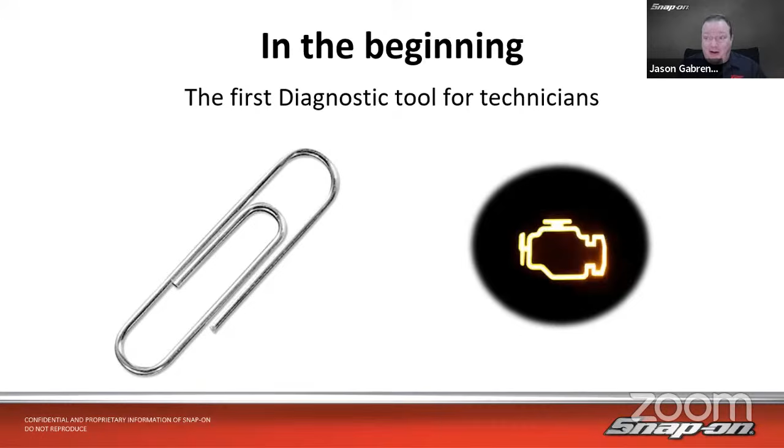So a little history, as we said, 1981, GM introduced the ALDL connector. ALDL stands for Assembly Line Diagnostic Link, and that's this guy down here on the bottom. This is the pinout for that. So different data links for different things, diagnostic terminal A and B. Really, you just short those 2 out, and that's where you get your flashing light, right? So that was one of the very first OBD1, I guess, connectors.

1988, CARB, which is the California Air Resources Board, they have a lot of say in what goes on with emission systems on cars, for better or for worse, but they required some OBD capability on all 1988 and newer vehicles. So if they were sold in North America, or at least the United States, I'm not sure how Canada went with that, but 88 and newer, anything sold in the States had to have some sort of diagnostic capability.

In 1996, they decided there was all this smorgasbord of different connectors and protocols, so they decided OBD2 would be mandatory on all vehicles in the US. That was SAE, the Society of Automotive Engineers, which came up with that standard and made it mandatory in 1996 in the US. Over in Europe, in gasoline engines, EOBD, European Onboard Diagnostics, was mandatory starting in 2001, and diesel vehicles were added as mandatory in 2004.

So as I said, back in the early days it was kind of the Wild West. We had all these different connectors. There's this Toyota connector, I think that's actually a Subaru connector. Honda's in there, BMW's in there, Chrysler's in there, Ford's in there. A lot of different manufacturers using a lot of different pin types. That's the Mercedes, that's the BMW. Different things on different pins, and that's how we communicate.

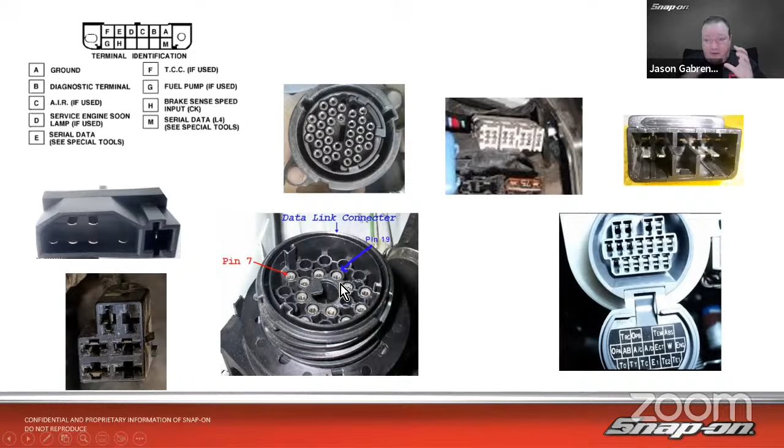But in order to communicate with all these vehicles, you needed all sorts of connectors. So we had all these different various connectors - one for the BMW, one for the Mercedes, a couple multi-pin ones as well. If I had one that wasn't really popular, it would tell you where to hook up each wire to get to where you needed to go. Plus they had all the other major manufacturers. They did have some kind of weird ones too, like Mitsubishi here.

We had to actually use OBD2 and OBD1 - it was kind of like an OBD1.5 going forward. That was back in the early 90s, 90, 91, when they had those DSM vehicles like the Eagle Talons and the Mitsubishi Eclipses, things like that, where they're all kind of the same car but under different brands. You would have to use that weird connector for that.

And now all of these would still work today even. So if I have a 1985 something or other coming to my bay, I can still hook up to it as long as I have the right connector. And then there's a little adapter here that we use - you've got a 15-pin on one side, and then your standard OBD2 connector on the other side. So you hook up your Snap-on scan tool to the OBD2 side, then pick whatever adapter you needed, plug it in there, and make sure it's powered up because it does need power. There's little power ports on the sides.

Once it was powered up, though, you could go in and scan it just like with a Solus Plus, Zeus Plus, whatever - all the tools work all the way back to 1980, 81. So that's helpful if you have any of these connectors from way back in the day, because I know people have probably still even got their own red brick. Some of you out there might even still have it. The connectors that came with that would still work today, and actually you could still use the red brick on those cars nowadays too. Some people do, because they just feel maybe it's a little faster - maybe that could be the case because it wasn't all that complicated back then.

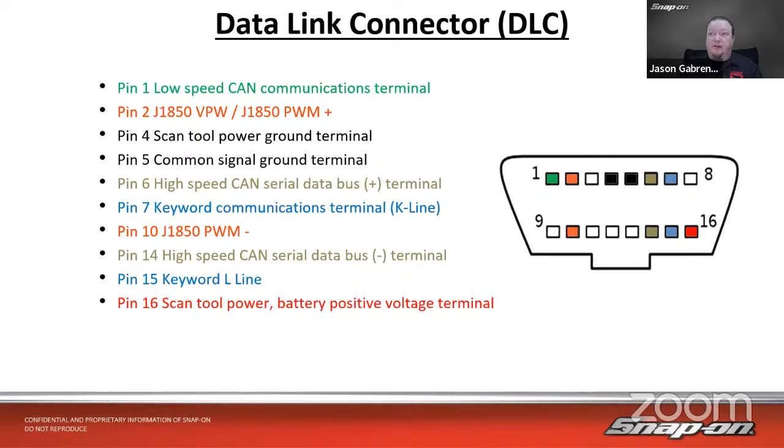You may have heard me speak about a vehicle's computer many times like a house, right? So it's got a front door and a back. Coming in the front door is going to be all my inputs - my coolant temp sensor, my NOx sensor, my oxygen sensor, all those inputs go in. Then the computer processes it, and then it sends that data out the back door to the scan tool.

Now, what I don't talk about as often is that inside that computer, there's also two rooms, if we're still using that house analogy. So we have an OEM VIN specific side, which is where you would go if you click on scanner - that's the OEM side. There's also the OBD generic side of the PCM, and that is going to be pretty much the same on every single vehicle. We'll talk about some differences as we go through here.

But there are two different ways that it's going to process that data. This is up to the OEM - however it processes it, and it can be different. The OBD generic needs to be the same no matter what, across the board - it needs to give the same data, the same instructions, and so on. And you'd access that side through OBD Direct.

You can also access it through the scanner side. There's a way we can kind of break that wall, put a little window through it, and get on both sides at the same time. I'll talk more about that later on in the presentation. We go live on the vehicle.

Just be aware, there can be times where you will have a different number of codes. You could have 5 codes on this side, 3 codes on this side, or 3 codes on this side and no codes on this side. It's going to vary depending on whatever threshold the manufacturer decided to set in order to set a code, versus what the federal emission or California emission standard is on the vehicle as well. So they will process them differently - you can find different numbers of codes, or different codes entirely.

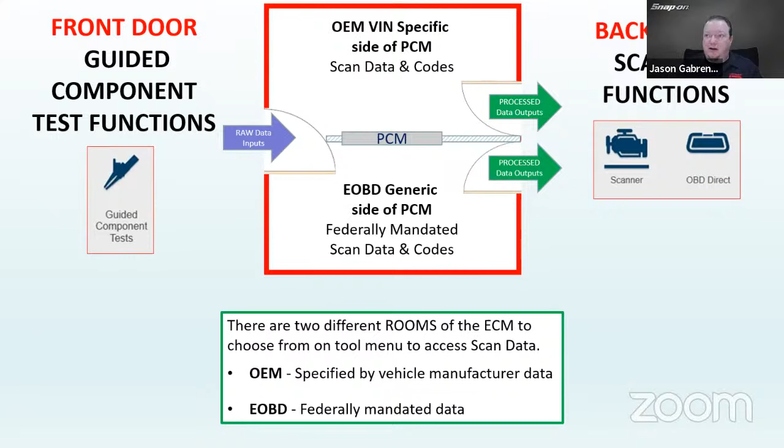Just be aware that's not a scan tool problem - that's just how the manufacturer set up their computer, that's the issue. I'm pretty sure I have some examples of this as we go on throughout the presentation. But just know there are two different sides, and that's why we're focusing on the OBD2 side - because we usually focus on that OEM VIN specific side, but there are differences in between.

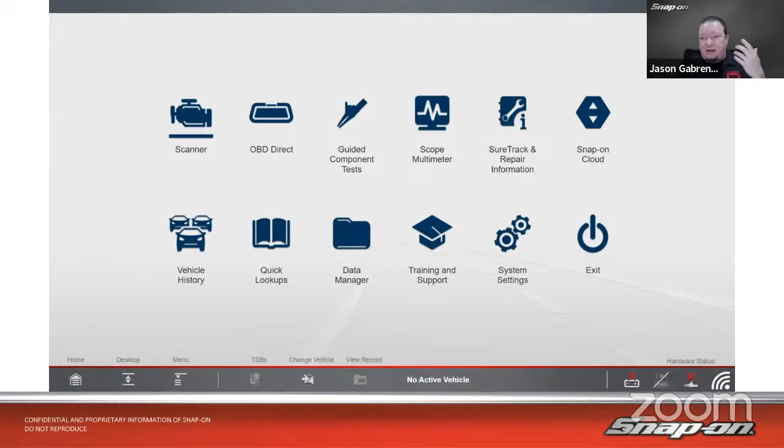So in order to find that information - to get into that OBD generic information - we're going to want to use the OBD Direct icon on our tool, however you access it. If it's a Snap-on tool, it's going to say OBD Direct. Other manufacturers may do it different ways, but all scan tools need to be able, at least in the States, to get into this side.

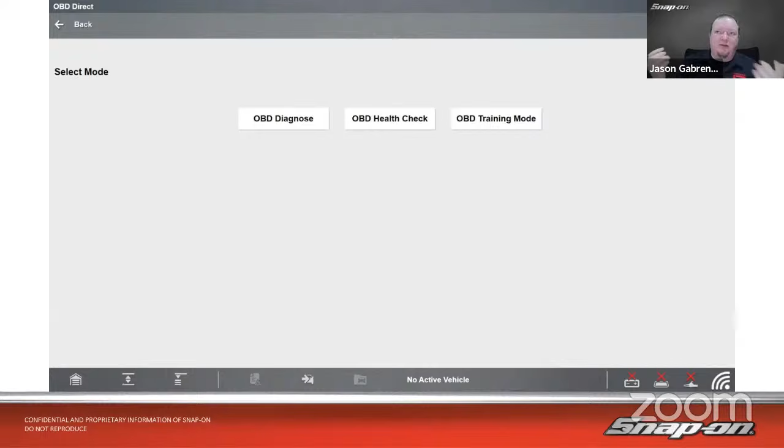Now you see we've got OBD Diagnose, we've got an OBD Health Check, which is kind of like a code scan, and then we have the OBD Training mode. If you have a Snap-on tool, you can go into that OBD training mode without having to connect to a vehicle, and you can go in and just kind of read through it, look through OBD2, and see what the deal is. But in this case, we're going to go to OBD Diagnose.

We have Start Communication, Connector Information, and Manual Protocol. So in order to actually communicate with the vehicle, we're going to go to Start Communication.

And then you'll see the landing page. Now, depending on the year of the vehicle, you may see some different things here. Some of the modes may be different. Some of the modes may be missing. You may have multiple versions of a couple of these modes, and we'll get through that as we go through the between this week and next week.

We'll talk about some of those differences and exceptions. For example, some of your newer cars are not going to list mode 5 because they kind of roll them up, mode 5 and mode 6. That's next week, we're going to talk about that. Some older OBD2 vehicles will not have mode 10 because that didn't come into play until like 2011, I believe. And then some of your mode 9s may be different too.

You'll actually see a difference when I go live on the tool as well. But if we're going to just go through what's displaying on the screen here, the first one's going to be readiness monitor. Now in readiness monitors, this is going to give you what monitors have completed either since the code was cleared, or what monitors have completed this drive cycle.

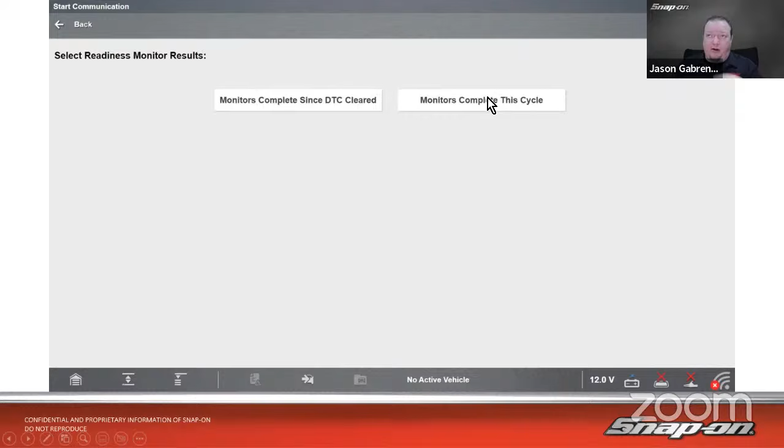So depending on where you are in your diagnosis and what you want to see, you can go in there. So monitors complete since the DTC is cleared. And you can see here whether or not it's complete or whether or not it's supported.

This is just on some demo data here, but you can see test complete or not supported at all. So this will allow you to go in, do a real quick check, say, hey, is this thing ready to pass an emissions test, for example? You do a plug and play emissions test, you're probably going to need that. You're going to have all but maybe one monitor, depends on the state, but it's usually all but one monitor completed on that. So you'd have to have all but one of those say test complete or not supported.

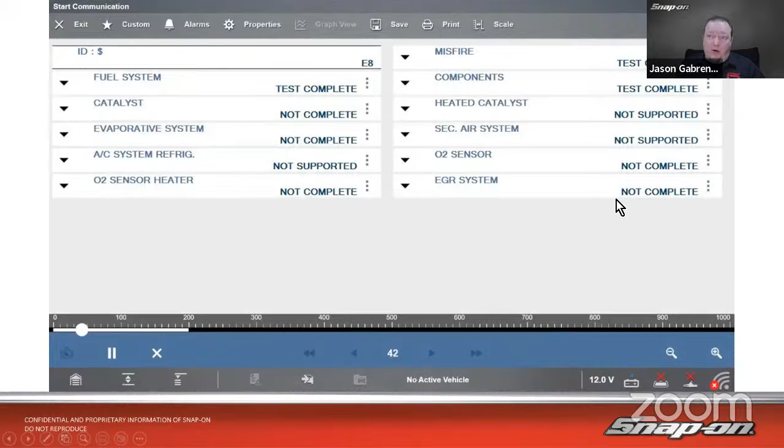MIL status is pretty self-explanatory. It's going to tell you whether or not the light is on. But here's one thing that's exclusive to Snap-on that I think is pretty useful, especially if you're kind of learning or relearning or trying to remember things about OBD2, maybe you don't use it all the time.

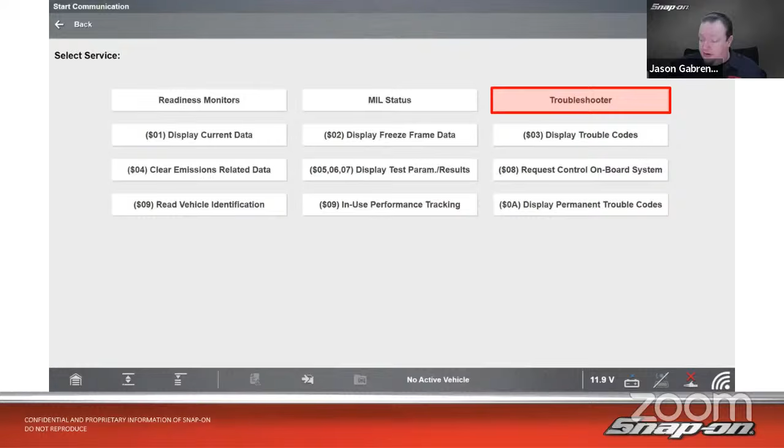So there actually is a troubleshooter in here. Engine troubleshooter. And you'll see we have code tips, parameter descriptions, which is very helpful, guidelines and procedures, and a general help section. So if I were to go into code tips and I wanted to look up information on a code, whatever it happens to be.

Is it a B code? Is it a C code? Is it a P code? If you want to learn what all those mean, if you look back a couple weeks on the channel, we talked about code basics and we talked through all that. But you would just select your code and it would give you a description of that code.

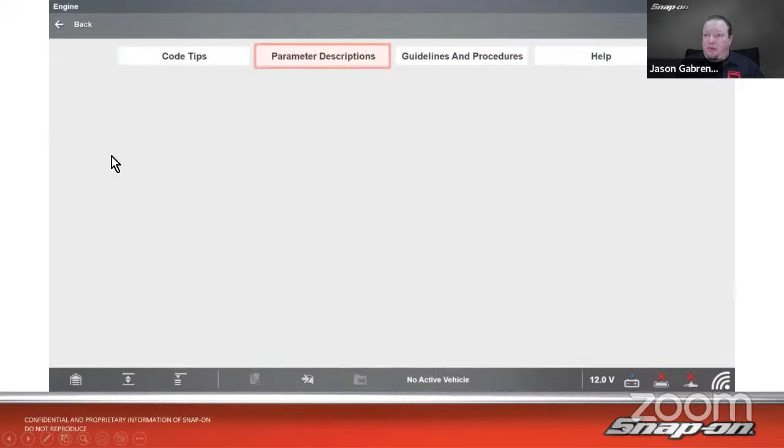Also parameter descriptions, like I said, very, very helpful with that. So we got, say, whatever I wanted to see, say like a voltage or something like that. So I picked oxygen sensor voltage bank 1. Expected reading will be engine cold, 0.45 volts and no switching. Engine hot and closed loop, 0.2 to 0.8 volts switching once per second. Read the data stream in conjunction with fuel trim for a further indication of history.

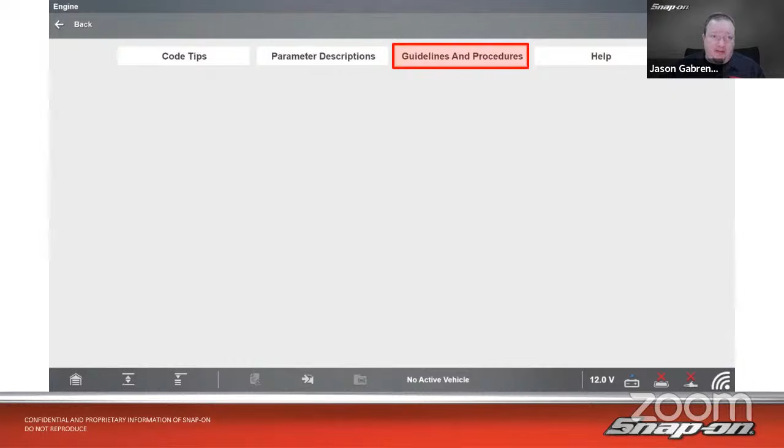Next one's guidelines and procedures. So you're going to see diagnostic services introduction will kind of give you an overview. Workflows, field recommended general mode information workflow.

So you can just go in there and say, okay, what should I check in what order? And then it also gives you each of the modes, or in this case they call them services, of OBD2. It goes from mode 1, 2, 3, 4, 5, 6, 7, 8, 9, and then 0A is mode 10.

Now I get questions on this. What's the dollar sign? Does that mean I need to pay for it? No, it's just computer language. They just put that dollar sign character in there for, I'm not 100% sure why, but it's just a computer thing.

And then it goes from 09 to 0A because we're doing base 16. Computer language is base 16. So if I went from 9, the 10th digit would actually be A, because it goes 0 through 9 and then A through F. That gives me 16 characters I can use in computer language. So it goes 08, 09, 0A would be 10. Just know that there is no actual 10 in there, it's always a leading 0, so to be A. If they added a mode 11 somewhere down the road, it would be 0B. So it just keeps going up on that base 16.

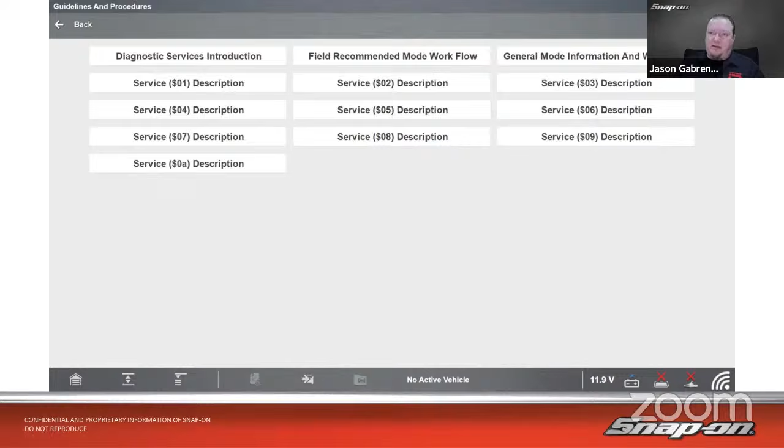And then we have help. So if I need generalized help in here, 5-digit OBD2 code information, readiness monitor information, generic drive cycle information, not vehicle specific, because there are vehicle specific drive cycles too, and abbreviations used.

So let's look at the different modes. Like I said, we're going to go through the first 4 tonight, and then next week we'll go through the other 5. So, OBD2 modes.

Mode 1 is going to provide access to diagnostic data such as inputs, outputs, and status. This is going to be your data stream. All values are going to be current values, and no substitute values are allowed. This can be helpful if I'm on a vehicle that has some sort of data substitution that might be part of the logic. You can go in there and see here's actually what's happening. The computer's not going to lie to me, it's just going to tell me here's what's going on.

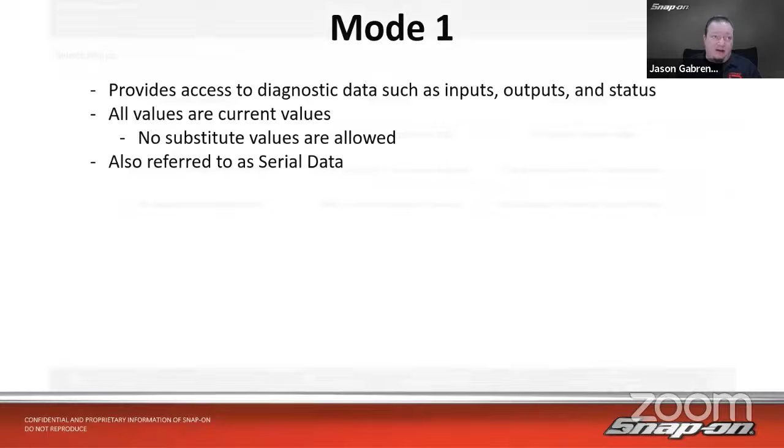This can also be referred to as serial data, you may have heard it called. So we would simply go into mode 1, display the current data, and it'll give us our data stream like we would be used to anywhere else in the vehicle. But just know that there's no substitute allowed in here, so you do not see that substitute data.

Mode 2 is going to provide access to freeze frame data. So what freeze frame is, is that mode 1 data, the data stream, from the time of the fault. Once again, all data has to be actual values, no substitute values are allowed. So this might help you a little bit more than just looking at the OEM data.

Freeze frame data can also be used to duplicate vehicle conditions for diagnosis. So it gives you here's what happened exactly when the fault occurred. Was it cold? Was it hot? Was it driving for an hour? Was it driving for 5 minutes? What was the throttle? What was the load on the engine? What do I see here? That helps you as a technician go duplicate the customer's issue.

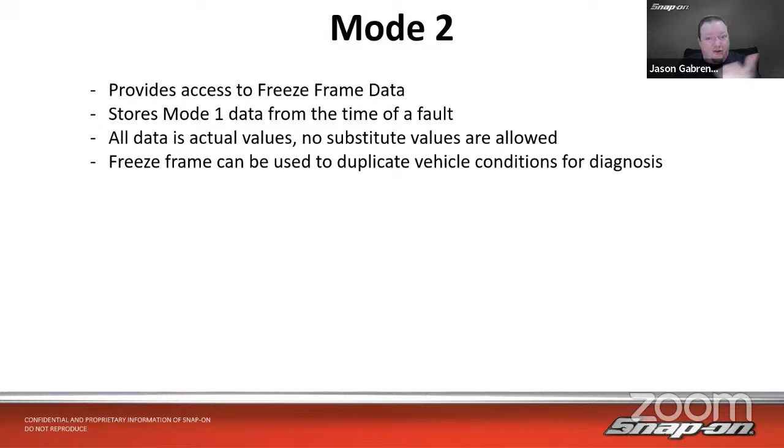So if it happened when it was hot after driving it for half an hour, then you're going to have to drive the vehicle for half an hour when it's hot, under those general conditions, to see if you can duplicate the problem, right?

And I love that too. You get the ones where the customer comes in and the car's hot, and then you go to the freeze frame and it's cold. I'm sorry, you got to leave it overnight. We got to wait till the car's cold overnight, and that usually doesn't go well, but that's what you need to do.

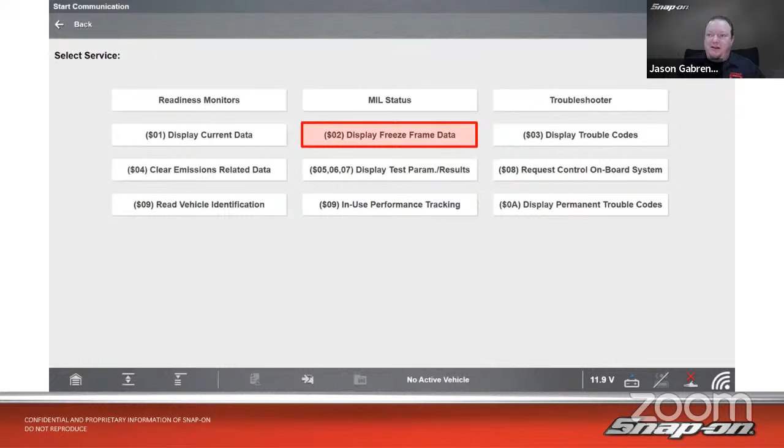So you'd go into mode 2, freeze frame, and then once again you would see here's what happened at the time the last code set.

There it is. Then we have mode 3, and that's going to be your codes, right? So it's going to be emissions related DTCs, emissions related only. So it's not going to be body control modules or chassis or anything like that, you're going to see emissions related DTCs only. So it's going to identify the faults using specific criteria. It could be signal or component short to ground, signal or component short to battery power, or no signal or a component open circuit.

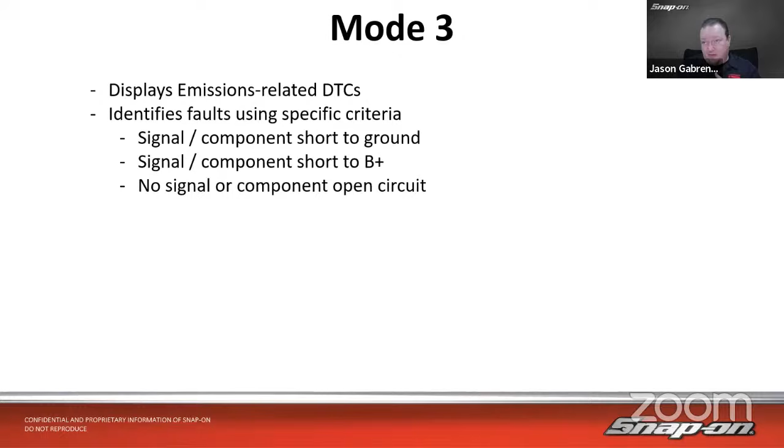It's going to give you those codes generalized in that way. Go into mode 3, and you'll see in this case we got 1, 2, 3, 4, 5 different codes listed. I think this is on the demo vehicle, but you'll see intake air temperature sensor 1 circuit, bank 1, mass or volume, circuit range of performance, circuit low, circuit intermittent. You'll get those sort of descriptions.

And by the way, remember how I talked about the two sides? Manufacturers can have different descriptions of codes versus OBD2. So that happens too. But the codes being the same would be the same, just might have a different description.

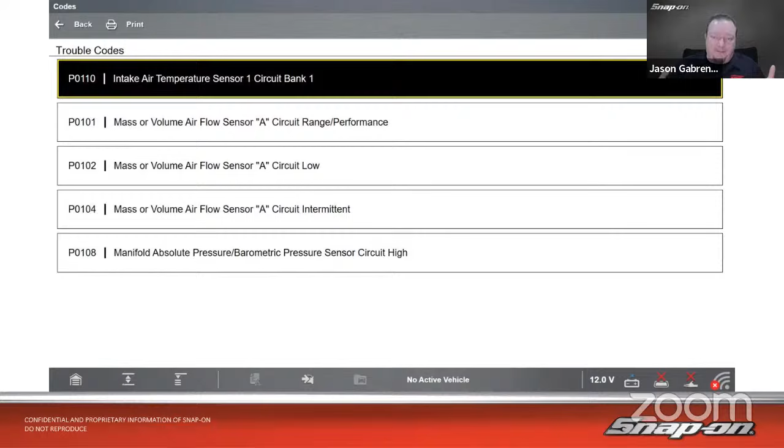Then mode 4 is going to be your last step, kind of. That's going to be your clearing emissions related diagnostic data. So not only is it going to clear a lot of things, just be aware, if you do this, it's going to clear out all the information, all the codes on the OBD2 side anyways. It's going to clear all the freeze frame data, all the oxygen sensor monitoring results, all the readiness monitors, and all the onboard test results. So if you go through and clear this and then expect the vehicle to pass inspection like in an hour, probably not going to happen because you got to go through a drive cycle.

Also note permanent codes, which we're going to talk about next week more, but permanent codes are not cleared in that case. Permanent codes are mode 10, and those are codes that have been cleared in the system, but then they flip over to these permanent codes, and they're going to stay there until the computer either passes the code test -- so it goes through the test to run the code and it passes -- or 400 days, whichever comes first. So permanent codes can be helpful. We'll talk more about it next week, but it can be helpful if the customer disconnected the battery to get the engine light off. If they went somewhere and had their buddy clear the codes or something like that, you can see what codes were there, and is it still a problem with the vehicle?

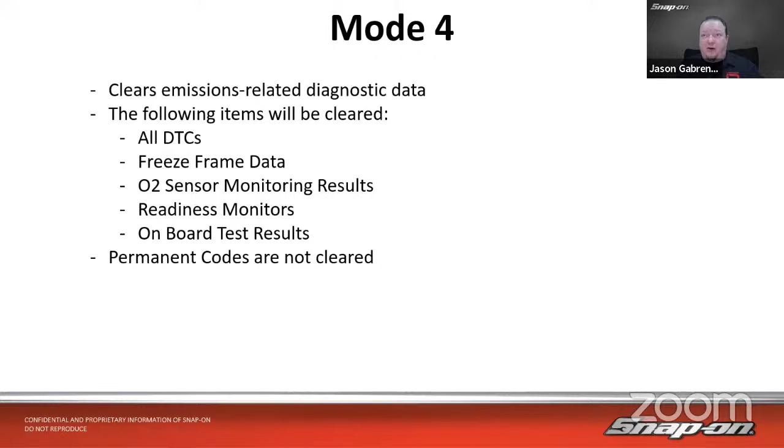So mode 4, you go in there, it says clear diagnostic data, it says all emissions related diagnostic information, MIL, diagnostic trouble codes, freeze frame, etc. Okay, so let's look at the tool.

I have it connected over here to my little Chrysler scanner demo board, and we're just going to walk through a few of those things that we talked about. So I'm going to go into OBD diagnose.

Yes, I'm scanning a real vehicle. Start communication, manual protocol. If you know what protocol the vehicle uses and you want to use that, that can be helpful -- not necessarily on a car. If maybe it has an OBD2 port, or you know what pins are what, you might be able to hook up things that are not cars.

I know I had a boat that a customer had that had a BMW 3-liter in it. Wasn't necessarily a car motor, but I was still able to go in and get data. If you find the right pins for the diagnostics, you can go in, manually select your protocol, and sometimes you can get data. It doesn't happen all the time, but in this case it just did, and I thought that was kind of cool.

There's also connector information in here. So if I need to find the connector on a vehicle, like, I don't know, let's say Lamborghini -- it's on the left side in the center console. All right, so that might not necessarily be a standard location. It's in the left side in the center console.

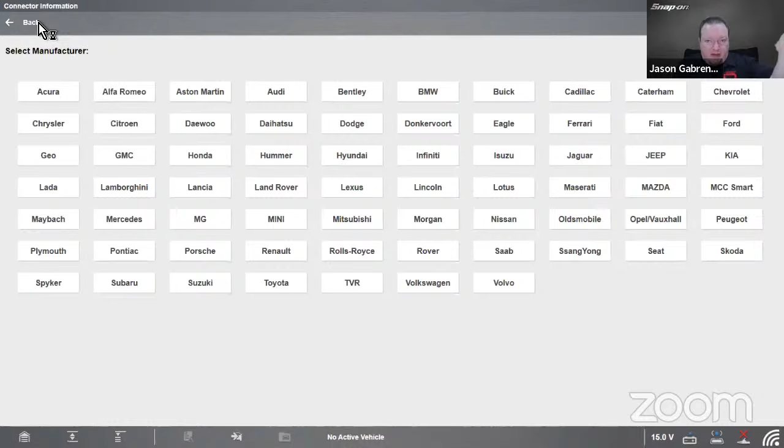Especially if it's a vehicle that's fairly standardized at this point, like Subaru -- let's see what it says about a Justy, right? So Justy was in the driver's door side steering column lower dashboard. There were other Subarus where it was like in the kick panel -- an XT, if I recall, was in the lower kick panel. You had to find the yellow connector, right? So it's not an exhaustive list, but it could help you with some of those weird off-market cars that you don't necessarily see every day.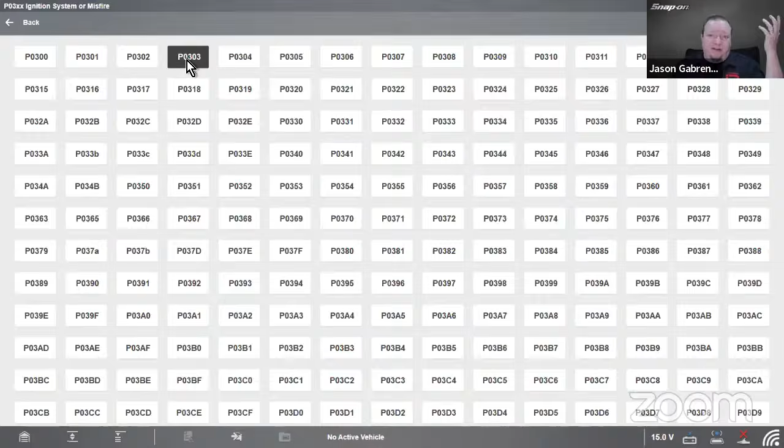If I go back, troubleshooter, I did want to talk about a couple different things in this troubleshooter, like the code tips. So let's say I wanted to take a look at a P0 something or other. And then we have P00, P01, P02. How about P03? Ignition system misfire. So if I wanted to go into your P0303, that's pretty common, right? Sorting the engine control module when an irregular combustion event occurs.

ECM is programmed to expect a predictable reduction in crankshaft speed during a compression stroke, etc. You can read through that if you want. Possible causes is going to give you that down here, just going to give you generalized information.

Let's pick a different one, like a 353. That's ignition coil C, primary control circuit or open. 03A1, cylinder 2 pressure sensor circuit low. So there's a pressure sensor in the vehicle, that's that code there. So you'll see it gives you a full list of every possible code that could happen.

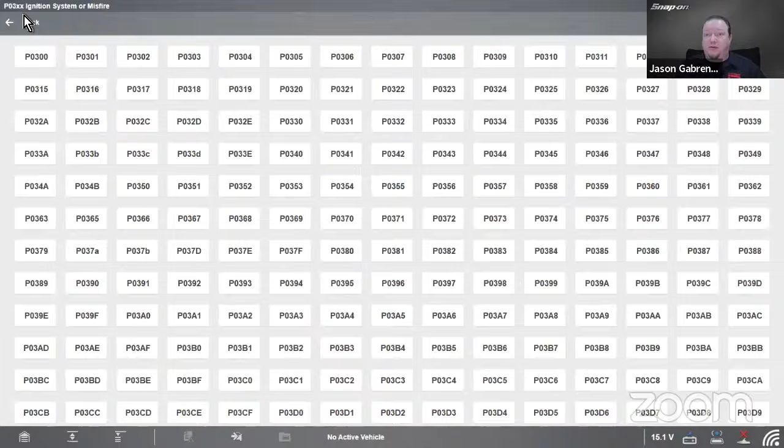And notice how when we get down here, we get into these hexadecimal or base 16 type codes, right? B03, and then that'd be 15, right? Because it goes up to F for 16, 15. So obviously all these codes aren't going to show up on a car, but they could show up on a car somewhere. Not all possible on the same car, but on a car somewhere out there, it's a possible code that could happen. So it's going to give you links and just show you information on that.

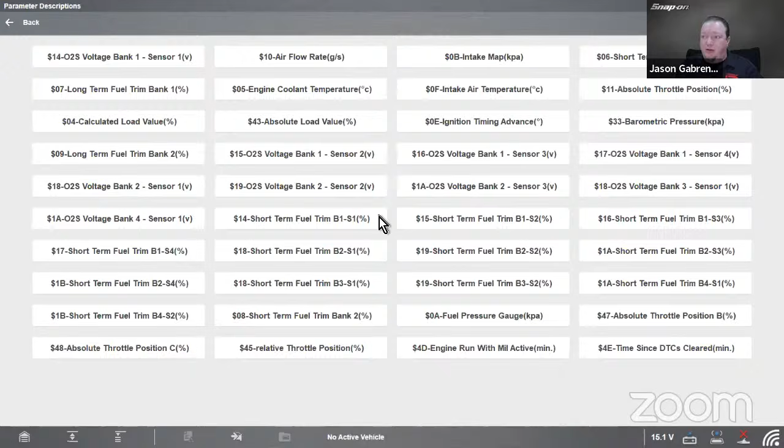Parameter descriptions, let's say coolant temp sensor. This must give us some data at the same time now. So it's going to give you the different, should be similar to outside temperature, between 10 to 20 degrees Celsius, amount of fuel injection, et cetera, et cetera. I'm not going to read through all these, like I said, take a while. But fuel trims, engine run with MIL active, relative throttle position, calculated load value. What do these all mean? I can go in here and it'll tell me what good should be and what it's going to look like.

Guidelines and procedures, like a workflow, right? So carefully study the vehicle, verify the customer complaint, connect the scan tool, check for codes first, then check freeze frame, etc. It just gives you a good workflow to work through and then clear it and so on.

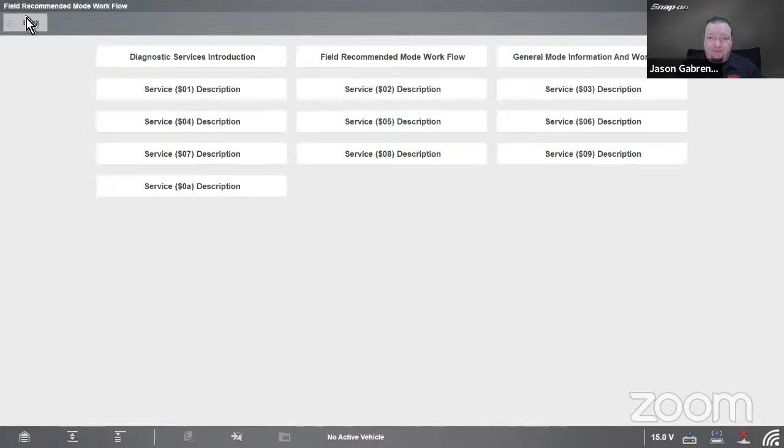And then it gives you your different mode descriptions. So let's see, mode 4, mode 3. Mode 3 displays all stored emissions related DTCs. It identifies the signal fault or sensor fault using specific criteria. All right, so it'll just tell you, if you have any questions about any of that stuff, it's on the tool in the troubleshoot.

And then like things like freeze frame, right? We talked about that. It's going to be on whatever the latest code is. It's going to give you the freeze frame data.

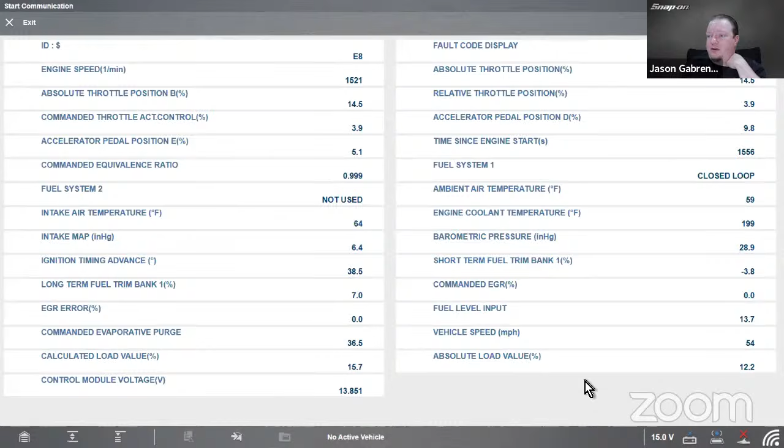All right, so we can see that. Now here's the code P1404, and it's going to go through and give you the speed when it happened, etc. So all good things. That's all part of the generic side.

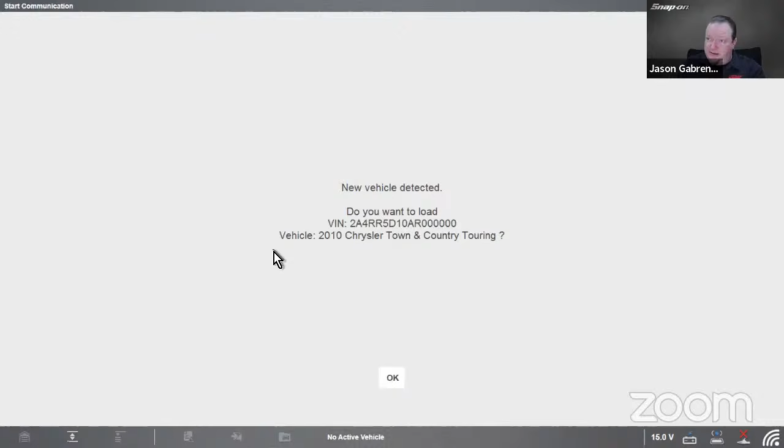Now, I also mentioned that you can go through and check it from the OBD2 OEM side as well. So you want to add vehicle details to the OBD direct section. You can also add this. Since it's a generic vehicle, you can hit yes and it'll save a record. I'm just going to hit no because I don't really need it. I'm going to go into scanner, and it already has it loaded. So I'm going to go in here.

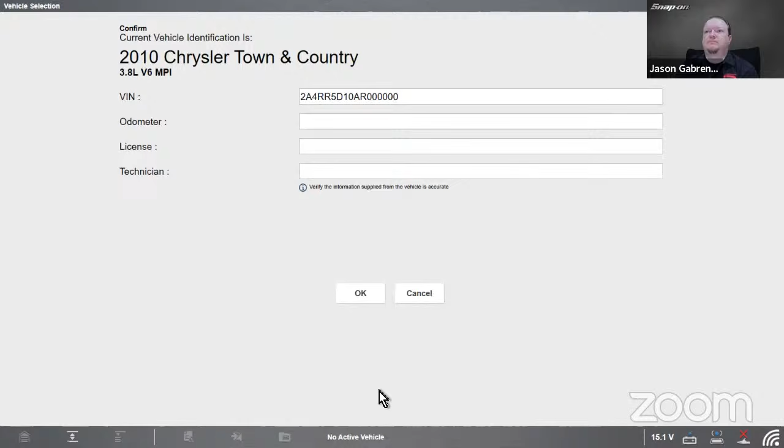And we'll see how long this takes. I may need to cycle it again. Okay, there's my vehicle, 2010 Town and Country with 3.8.

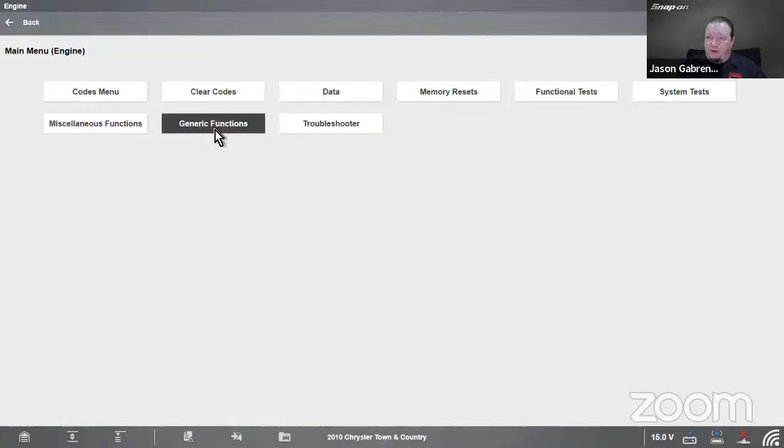And then on some vehicles also, it'll do fitted systems on the OEM side, so it'll just show what systems are fitted to it. So if I wanted to go into the engine, you'll see I can go into codes, clear codes, data. This is, once again, the OEM side. If I wanted to go into generic functions, however, I can go in and it gives me most of the generic stuff for the vehicle. Doesn't have mode 1.

Doesn't have mode 10, and it has 4 mode 9s in this case. So it can vary from vehicle to vehicle once again. But if I wanted to go in there and look at freeze frame, I can still pop in there and do that. It's going to give me that freeze frame data. It's kind of like a hole in that wall between the two rooms that I talked about, right? So that'll be in there.

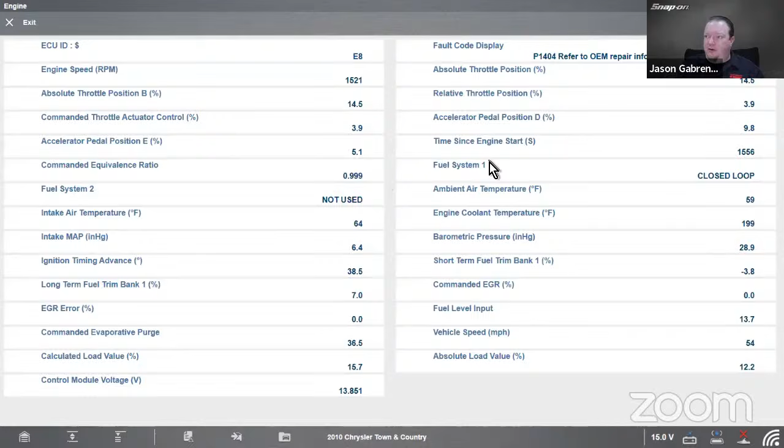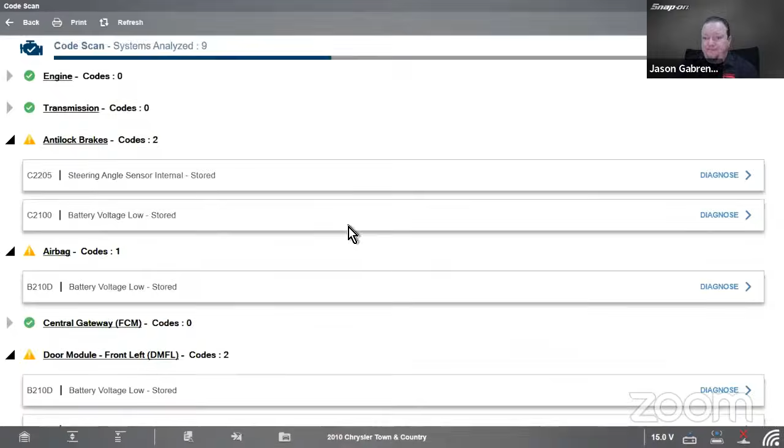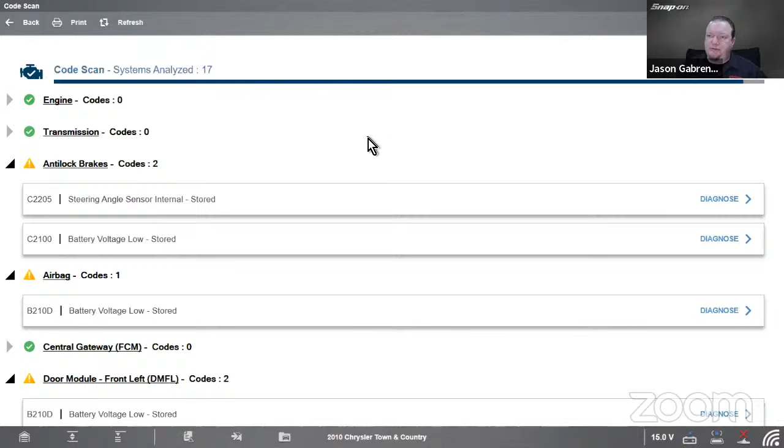Also, another thing that we do is if you do a pre-scan on the vehicle, or post-scan in this case. Now, in this case, there's only a couple actual simulated ECUs in here, so we're going to get a lot of codes, battery voltage and stuff. And it's going to take a minute because it is, once again, a simulator board. Door module. Through 9, I think we're like halfway there. I just want to show you a couple things here as well before we wrap it up for the week. Almost there, 15. I think like 18 or 20, I don't remember. A lot of it's going to depend on bus speed on the vehicle too. There we go. Finished and saved.

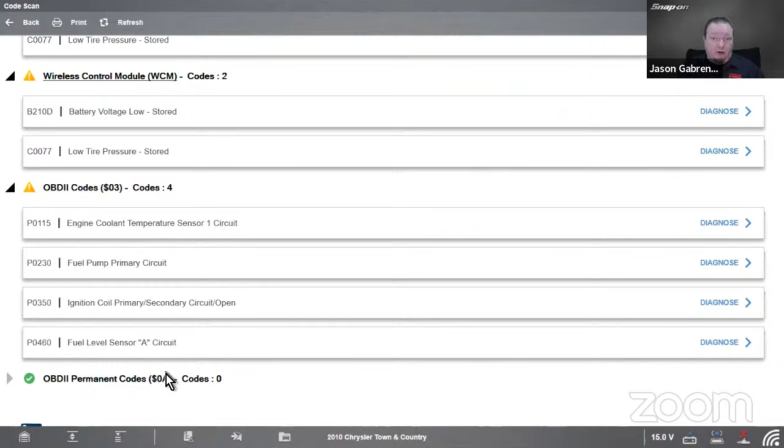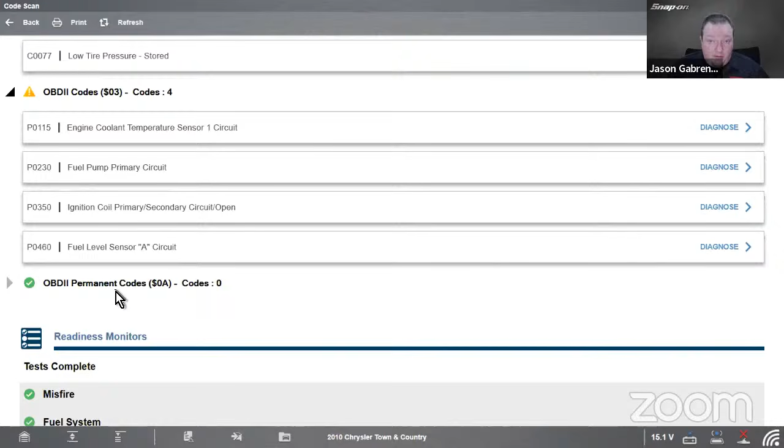So what I wanted to show you is down here at the bottom. After it goes through all the modules on the car, it's also going to check mode 3, so OBD2 codes in mode 3. And also checks their permanent codes, mode 10, which we'll talk more about next week. Notice how there are 4 codes in OBD2 and there are no codes in the OEM side. You may see that from time to time. I know GM has a thing with doing that. So you may see that. And oftentimes you need to clear the codes before they go over to permanent codes as well. Just so you're aware, sometimes you even need to do a key cycle before it trips over. Also checks the readiness monitors for you too. So it pulls in a lot of that generic data into the OEM side when we do that code scan as well.

All right, so there's our first 4 modes and the history of our OBD2. Hopefully you picked up a few tips and tricks there that we can use, and hopefully you'll continue on next week to see what we have in store for that.